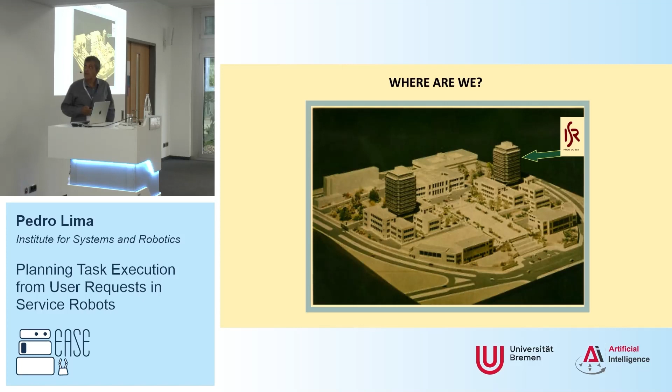IST is the largest faculty of engineering in Portugal from the University of Lisbon, and there are several research institutes. The ISR is one of them. Currently I am the president there, and I am also the coordinator, for several years, of the Intelligent Robots and Systems Group. And that's where the advertisement comes in.

You can see several of the things we are doing there, and it's just a small sample, but we really go land, sea, and air, even space. There's, for instance, an experiment made with the Sphere system on the International Space Station some months ago, and several times actually. We have a lot of stuff on domestic robots, which is what I'm going to talk about today.

We have an iCub in the group of José Santos Victor, which Giulio Sandini mentioned the other day. They also have some nice wheeled robots inspired by that. There's a lot of great work on underwater and marine robotics in general by the group of António Pascoal. And yeah, we also did some outdoor stuff with mobile manipulators and quadrotors.

And there are also groups who don't actually do robotics. They do signal processing, optimization, network systems, machine learning, and also a group which isn't even depicted here on biomedical engineering. So it's quite diversified, and we really cover a lot of different things. Most of the work is in robotics, but not really limited to that.

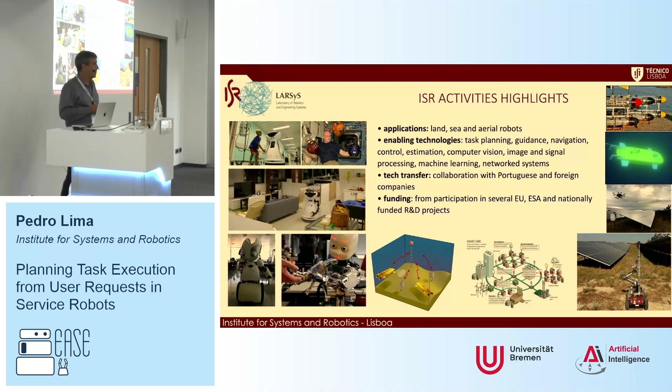And well, it's not written there, but we are always hiring, because there are always opportunities for people from projects and even from the funding of the institute. We have EU projects, national projects, and so if at some point you are interested, let me know, and there will be calls for sure in my group or other groups of interest for some of you.

Okay, so here's the outline of my talk, and let me just quickly go through it now so that I give you at least the idea of what I want to go through.

I'm going to talk about, exactly as Jorn was saying, the integrated system, which of course requires that some great work, like Rudolf just presented, is working fine for detecting objects, grasping, and so on. But I'm really going to look at the higher level picture here, though we are doing some stuff also on object grasping and so on.

I'll try to highlight what are the things which we take off the shelf and the ones that we do ourselves. In doing so, I will be focusing on service domestic robots. That's why I start with some requisites which kind of pave the way for what I'm going to talk next.

Then I do a small detour, which is important for me for a lot of reasons and for the presentation. I'll try to convince those of you who are not convinced yet about the value of robot competitions, which has been my passion in research all the time. And because of that, I'm going to show some of the work we did, which is really inspired by what we had to develop for the competitions.

And we take it as a research project for years. We have had several PhD students and master students doing case studies on that. So I really wanted also to take some time to talk about that, show why it's interesting, and then illustrate some of the results in the end with some of that.

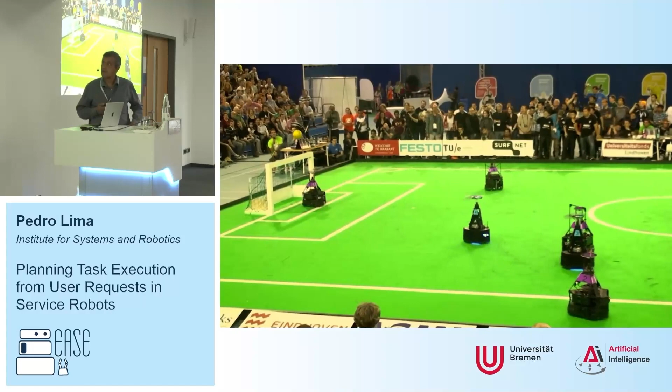There's a lot here, robotics-wise, which is amazing. The robots know very well their localization. They can act as formations, they have their roles. The goalkeepers, and all the robots in particular, have to track the ball in 3D, which is hard.

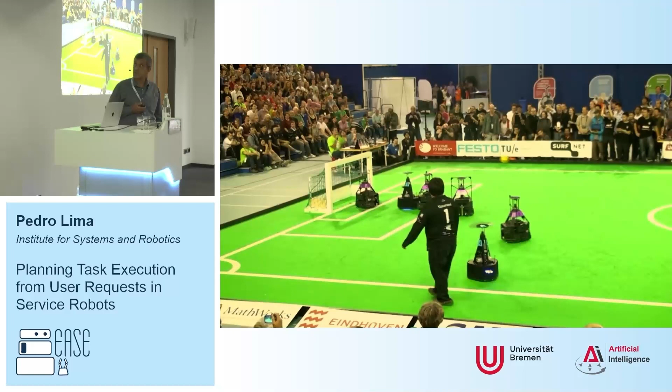This is already from 2013. Things have evolved even better than what you see there.

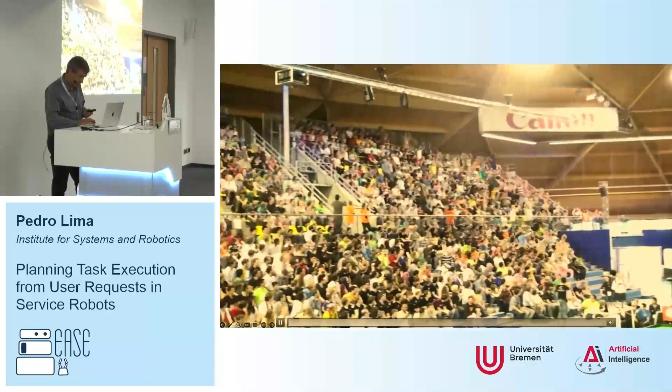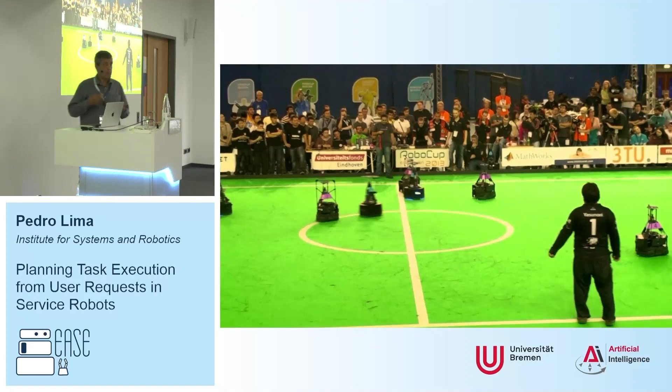There's also a lot of strategy already involved. There was one thing I couldn't call your attention to in the previous part of the video: a robot was actually scoring a throw-in, and one of his teammates was getting into position to prevent the other team from intercepting the ball. They communicate and do this kind of cooperative strategy.

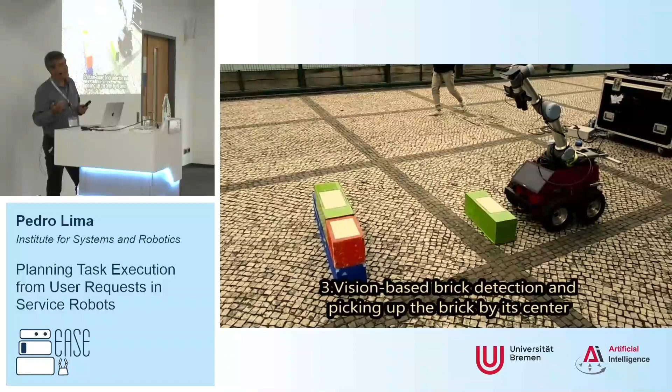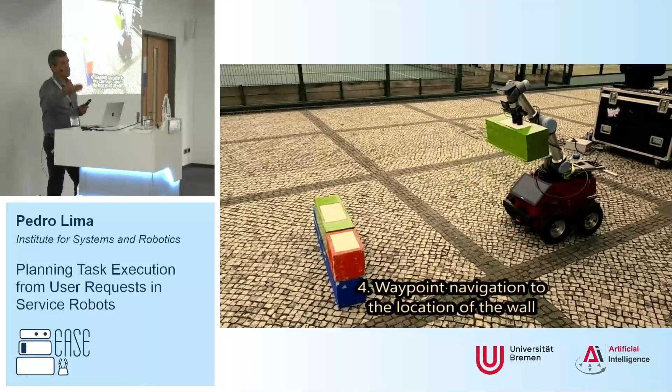Another example—this is actually from us—is from when we participated in the MBZIRC competition in Abu Dhabi three years ago. This is of the non-adversarial type, more of a challenge, as we used to say. In RoboCup, it's a challenge that goes over the years—you want to have a team of robots that defeats the human world champion team by 2050. So you continue improving the rules and pushing the scientific problems over the years.

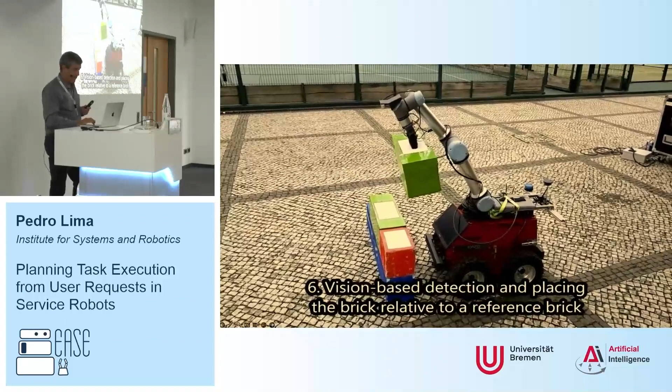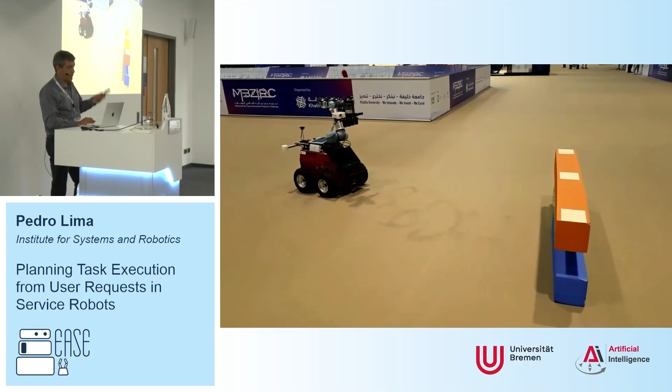Here, what we had were a few challenges that had to be solved that year. One of them was to put bricks on top of a wall. We had a mobile manipulator, everything autonomous—it watches the bricks and decides the sequence, which is sent to it just before the task starts.

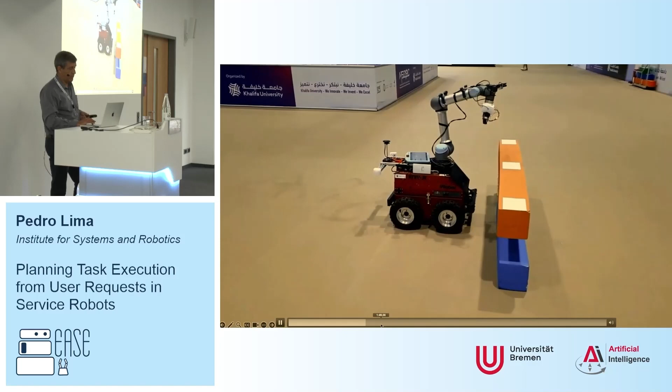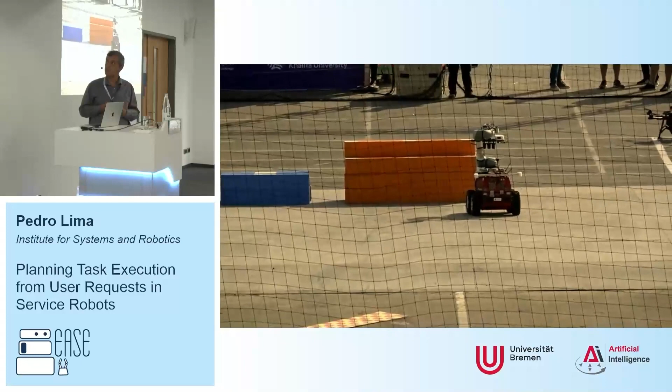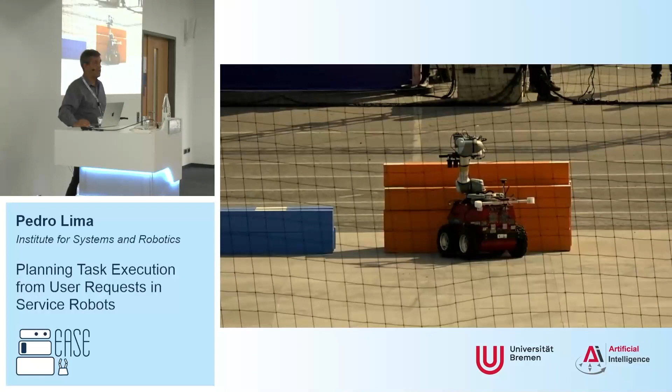Then it had to do it—this was indoors during training, but it had to do it outdoors in a realistic scenario. This included, though you don't see it fully here, quadcopters and ground robots that would cooperate to build this wall, each with different participation. This isn't meant to illustrate exactly what we did, just to show different types of competitions, the challenges they bring, and why they can be interesting.

Now, we started into this with a project in 1997 called Society of Robots.

And just a few months later, Manuela Veloso, who was already very active in RoboCup, came. I mean, she's Portuguese, she usually would go there. She gave a talk, told us about RoboCup and said that we really had to go. No way you don't go to RoboCup since you have a project on cooperative robots.

So it was the first time we heard about RoboCup, and we also put in the name of the project the soccer robots, which also fits very nicely with soccer. And so we started doing that, and we were in RoboCup Soccer from 98 to 2012, I think. And then we moved to RoboCup@Home in 2016.

And here we really have several research topics that we tackle, some more deeply than others. But of course, some of the things we did ourselves: mapping, localization, and navigation, including multimodal navigation in the sense of following people, not just going from waypoint to waypoint. That's essentially the two things. And of course, avoiding obstacles.

Perception, object detection, of course, people detection, grasping, pick and place as well, and a lot of, and this is what I will focus most today, decision making at the level of planning, but also of plan representation, plan analysis, using methods for that, and of course plan execution. And more and more we are getting into human-robot interaction, and that's why I highlighted some of the requisites in the beginning as important in this direction.

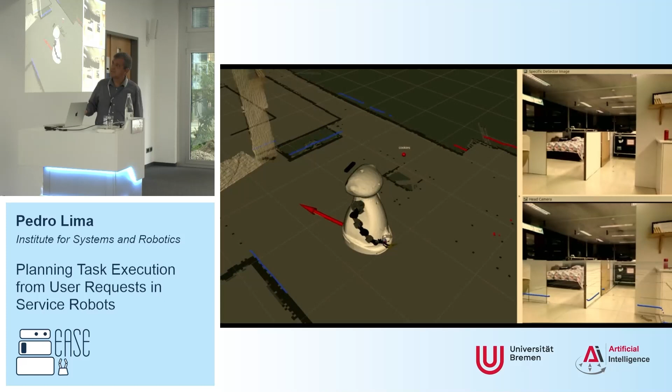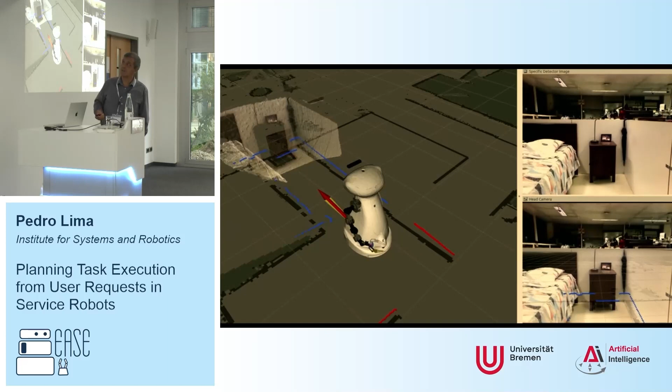The interesting thing also here is that we use a similar representation and reasoning for representing the knowledge and to update it, which is part of what I was saying. Well, this is back, I think, in 2013, just to illustrate the idea. I will skip this one, but as we evolve the robot, this is a real image, this is the projection of laser scanners, and we were also watching the objects that it was recognizing. And this is where the robot represents the estimate of what's going on, its location, what it sees; it superimposes the image so that we make sure that it's well localized.

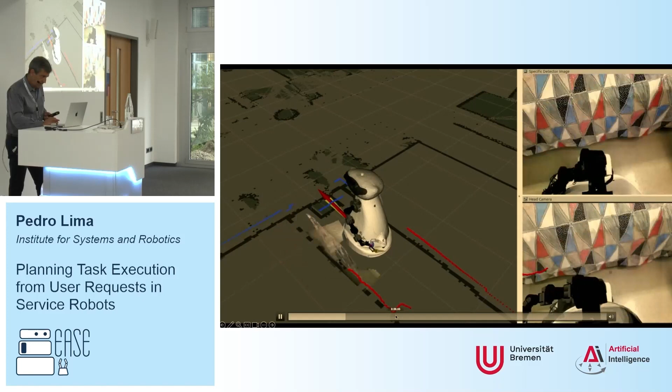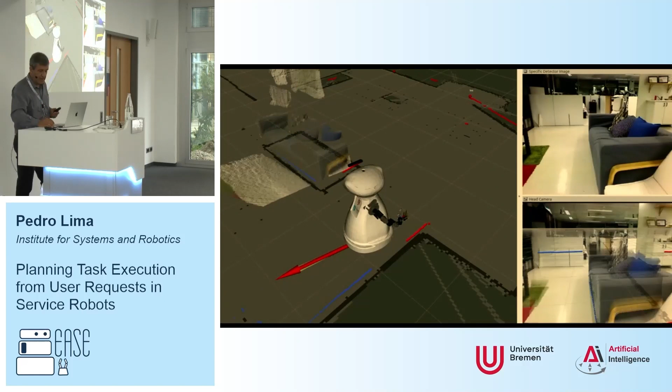But what is relevant, and it's not seen in this part, is that it keeps classifying the objects that it knows and that it has learned. And currently what we do is we put them actually in the Petri net. We put their location there. We even have something similar to a scene graph where we represent the objects, the surfaces where they are, and the room where the surfaces are. And well, this simulator that we have represents a lot of that stuff as well.

Just going to jump in. The detail of that diagram that I promised I would go into next is this one. So this is the part I showed you before, and these are the parts which are more specific now of the Petri net. So the intentions and facts coming from the NLU add facts and intentions to the generalized stochastic Petri net, the GSPN. And also, of course, there's an initial model coming from the known facts, and from that language I told you that generates the world from the fact that it knows the topological map, information about the objects and the robots and so on, and the action models. And all this plus the intentions which specify the goals is used to build the GSPN that I'm going to use to find the policy.

And there are different solutions we use: value iteration, labeled real-time dynamic programming, Monte Carlo tree search. These ones are anytime algorithms. This one is more precise but can take longer. And so once we have the policy, we can actually convert it into the policy of the Petri net executor and execute this part, which is the original GSPN, and send it to our robot and get the feedback and continue updating the state in the Petri net. There are things that we update in the perception that we don't update in the Petri net executor. We just leave it for the next step. So it's like two levels of granularity in our architecture. We leave it for the next time we plan, but not while we are actually doing stuff.

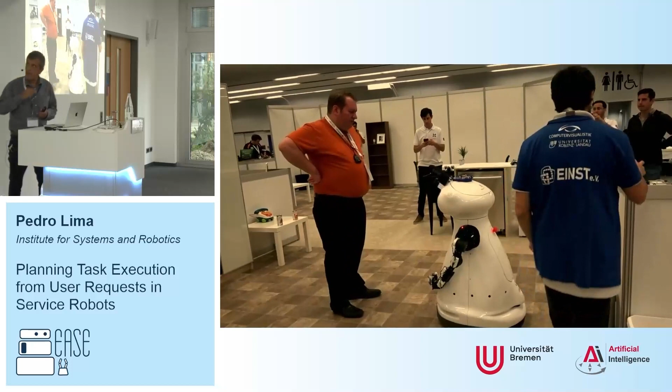Okay, some results. Well, I have 3 videos from different times. I'll go through them not in full detail because I don't have time, but trying to show you some of the things we were able to do with all this building, let's say. This is in Montreal in 2018, this was quite a nice task that we did. It's called Help Me Carry. This one is one of those which is predefined, so no planning involved. This was represented by a state machine, but it actually involves a lot of functionalities.

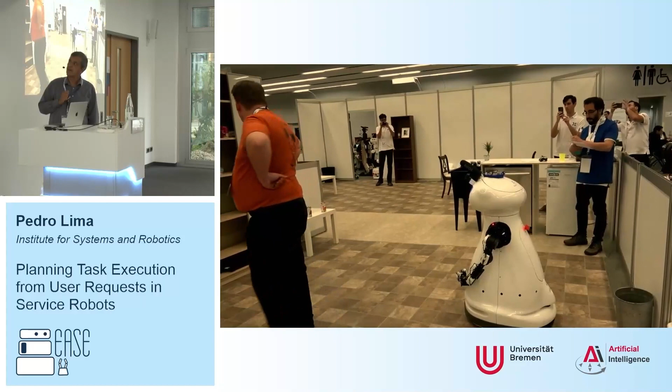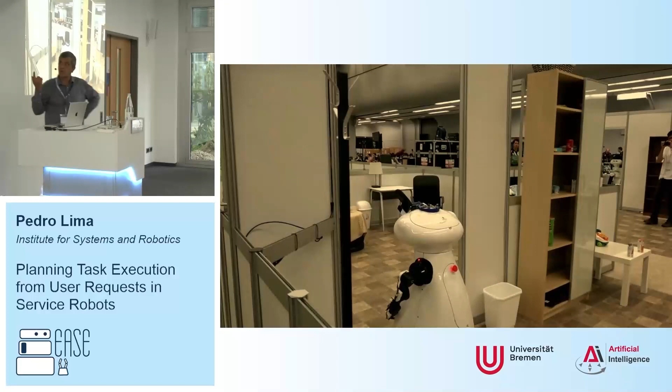So Justin is asking the robot to follow him. The robot first said, well, I'm ready, so please tell me what you want me to do. And now you see here navigation. This is a robot that we developed in the European project Monarch, and that we used for years also in RoboCup, endowing it with a manipulator. So you can see the robot doing navigation inside the room using the map.

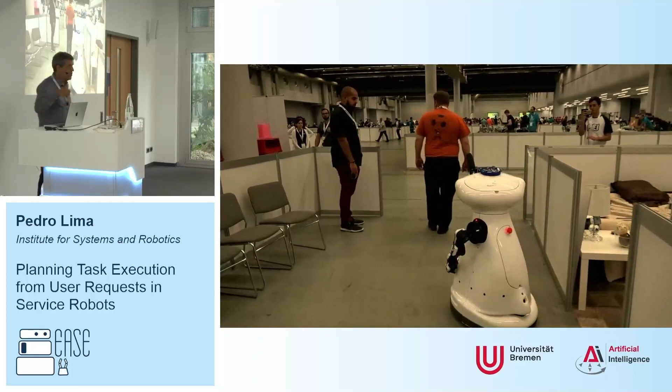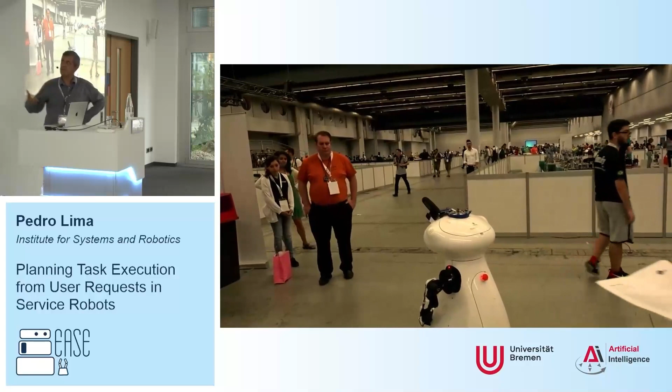Outside, the map is much more sparse, but he is following the person. At the same time, he is not getting lost because of people crossing the way. So there are a lot of challenges which happen to all the teams. You avoid obstacles and people in general. Over there was supposed to be a car with a bag, so that's the idea of the Help Me Carry. We were not doing manipulation, so we would just ask Justin to put the object ready, and we could pick the bag.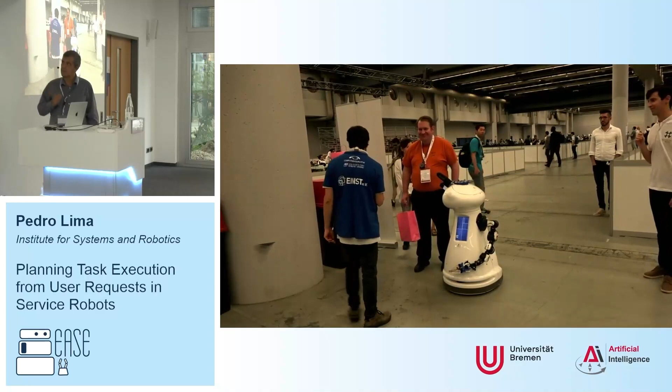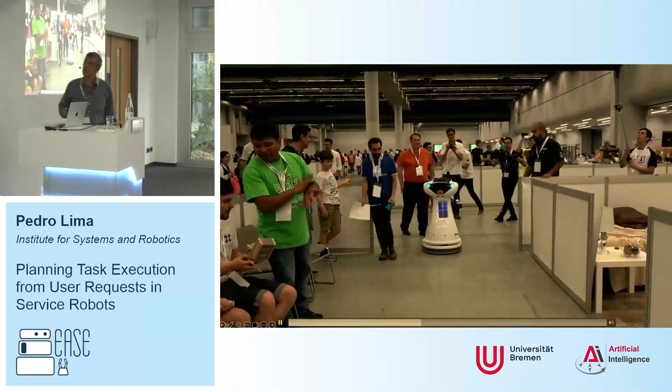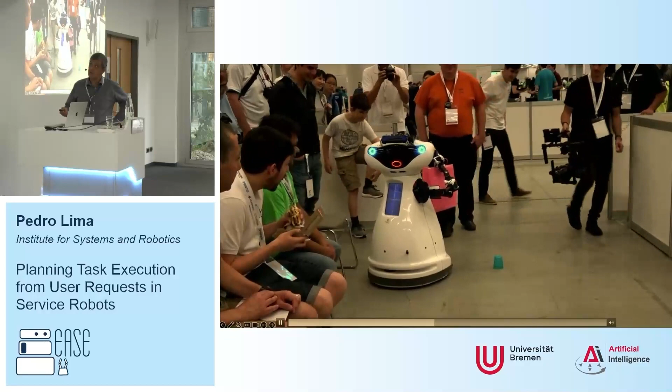And well, just going to the more interesting part, then we pick the bag, we go back, and here there are several challenges. First of all, the robot has more troubles with this part because it was not very well mapped. Then they put this small object that the laser does not see, but the camera over there sees it. You see the head is always looking at the direction of the motion so that it actually sees things like this when it's moving into them using the top camera. It avoided it, and the team was quite excited because we knew this might be a big hurdle and problem.

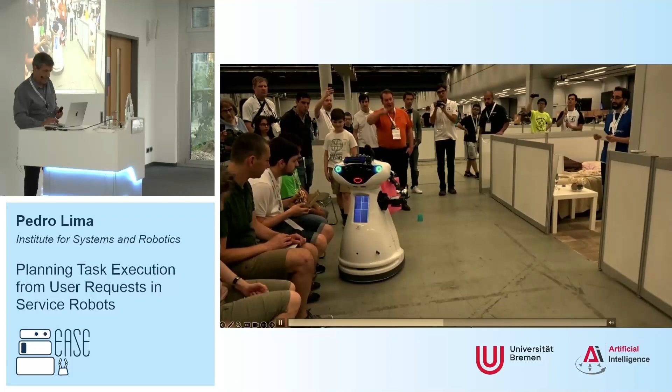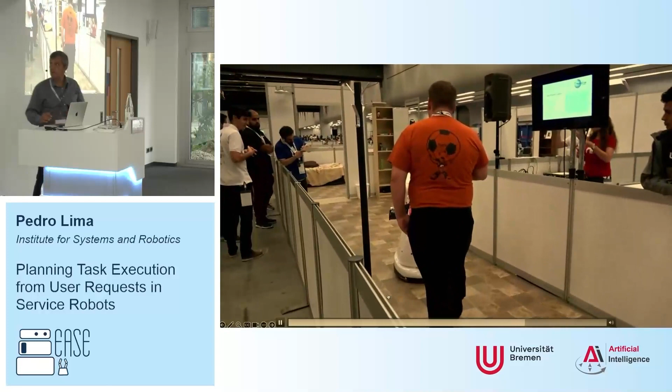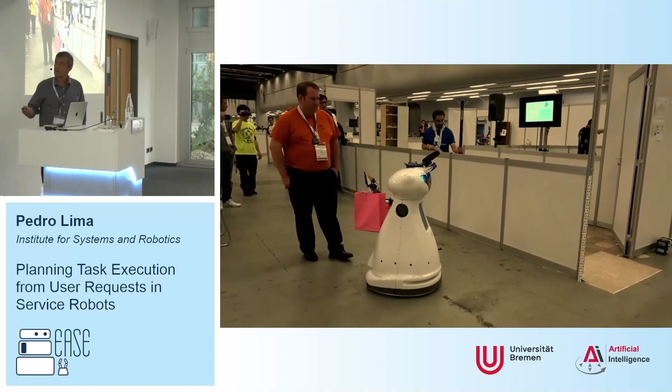And then it also solves another thing, which is slightly unrelated to what I said, but I think it's interesting to see, which is at some point the robot was slightly lost. No, moved too fast, sorry. It was slightly lost. It had to enter the room using this door over here, but it recovered from losing its localization. So it first tried to go to the wall, but then it recovered and it managed to avoid the wall as an obstacle and enter the room.

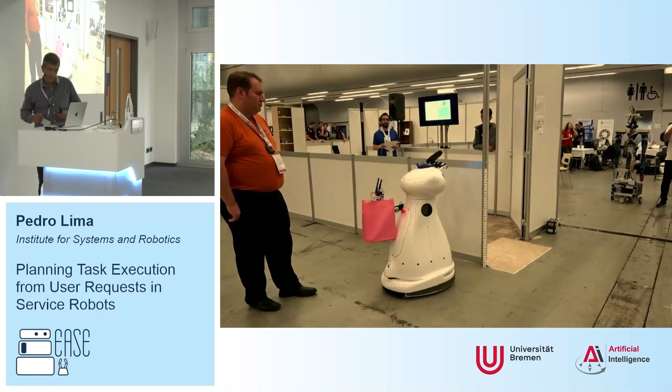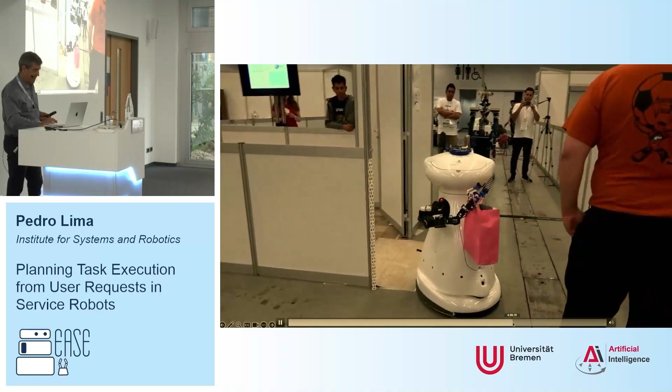And also you can understand why it carries the bag strangely like that, because it's the only way it can actually enter the room, otherwise it would be too difficult. It would not have space in the door. Okay, so it went on and everything was well.

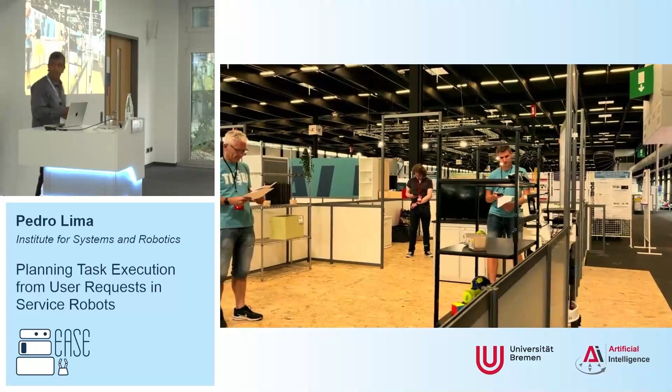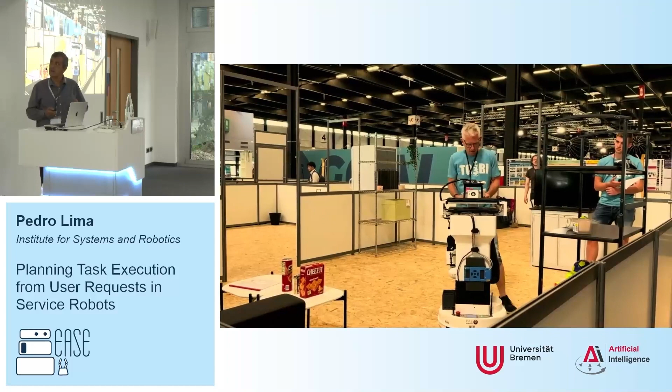This one is quite recent. It's from RoboCup in Bordeaux last July. And here we need some sounds. Well, we need not so much, because you would not understand it anyway, but there are the captions there. So this is something where we were very successful. We actually got an award for the best team doing this there.

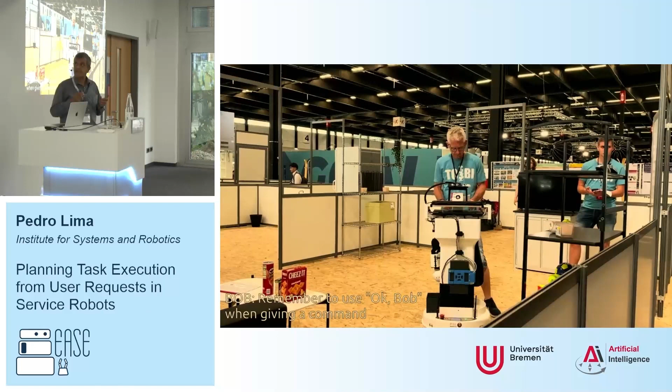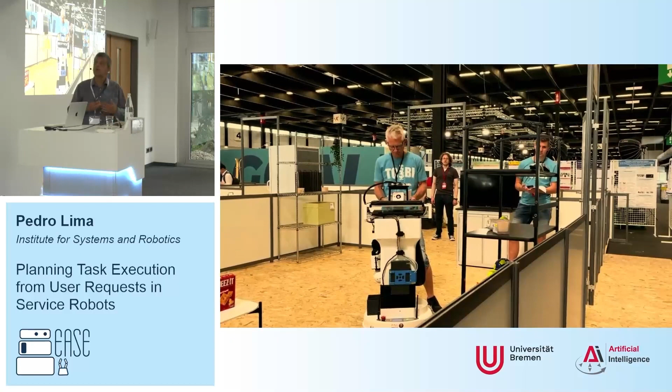And even over the last few years, according to what they told us, there's a task which is called General Purpose Service Robot, and this is actually the reason for a lot of what I showed you today, in which you ask the robot a command from a large set of commands. There's a command generator, but there are so many, it's as if there's always something that is unexpected. You cannot just prepare for all of them. You can probably train a neural net and do an end-to-end approach to this, but we are not doing that at the moment.

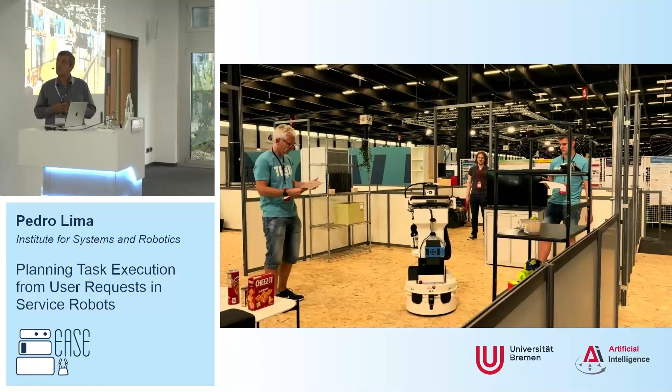So basically, then he asks it to go, I think in this case, to look for that guy and then tell something to a guy that is in another room. I don't remember and I didn't see. And so the robot has to do all the pipeline. So interpret the commands, plan what to do. In this case, it really needs to plan.

Either looking at objects that are there, identifying the person, talking to the person, listening to the person, dialoguing if there's a problem, and once it's done, taking the person to another room, in this case. He did not understand initially, I think.

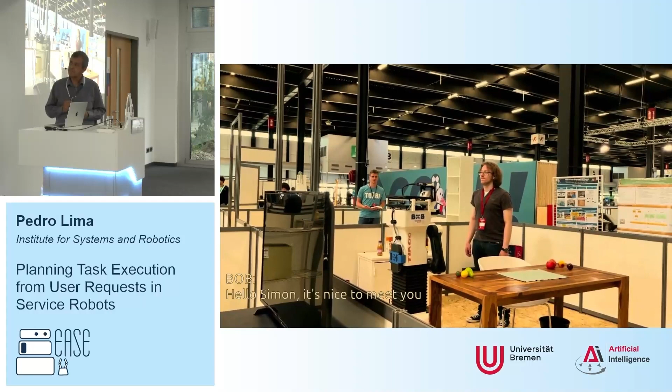Let's skip this part on the benefit of time.

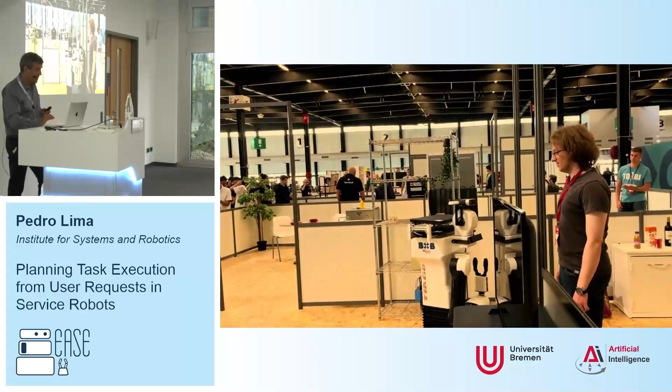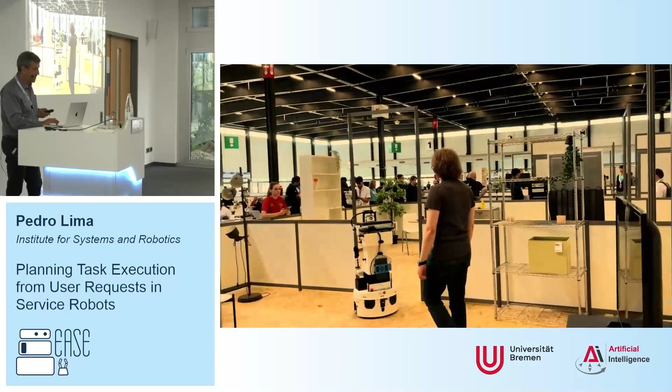So now he asked Simon to follow it, but because it's following, it makes sure that Simon is there all the time. Every time it has to do this, because you can be penalized if you don't, or even if Simon decides to quit, it should stop and ask. So whenever it crosses a door, it does that, and it's actually nice to see.

It does it again here. And last slide, promised, well, yeah.

But for 1 hour I have 10 minutes, right? I will miss the questions, yeah, exactly. I don't want to miss the questions. This one it would be nice to go into detail, but I won't.

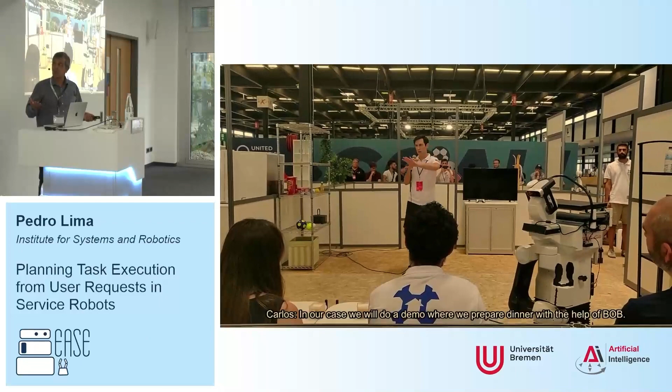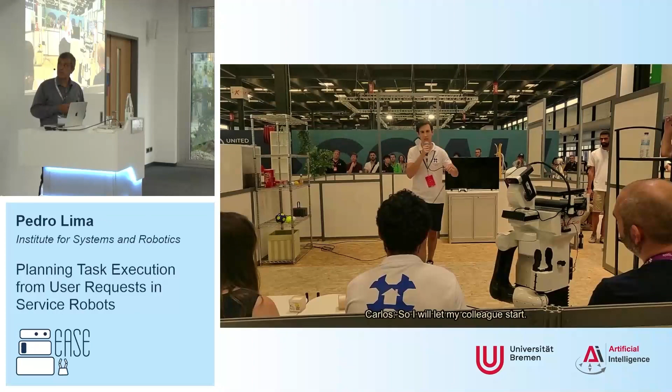I just wanted to tell you that the setup we had ready allowed us to take on this challenge, which was put to all the teams that reached the final 4, and in fact the final 2. We were second this year, the best European team, but there was a Korean team that won here and also in the domestic standard platform league, with Toyota. But I think we did quite well.

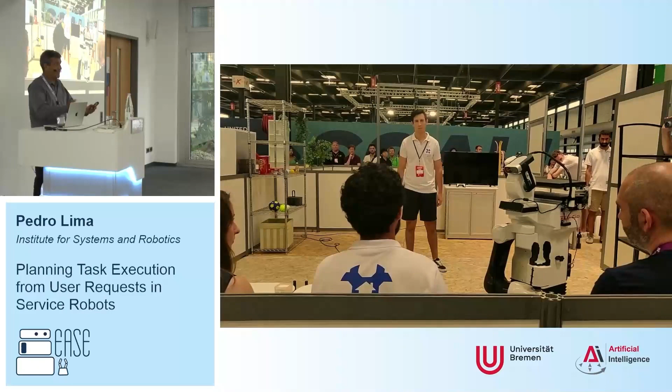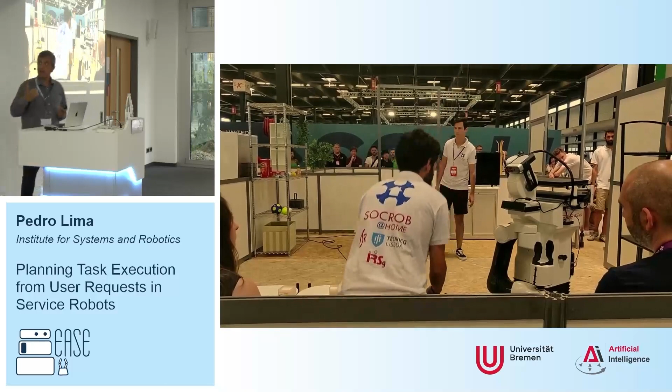In the final, one of the components is you have to demonstrate something you built there in a few hours. The day before the finals, you build it up to impress a jury composed of technical and non-technical people, showing that the robot is useful for the task it does.

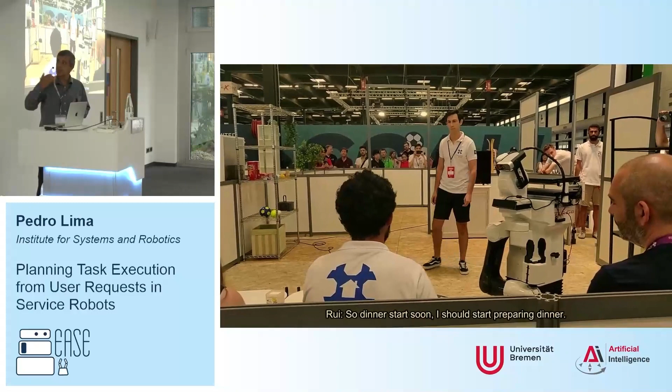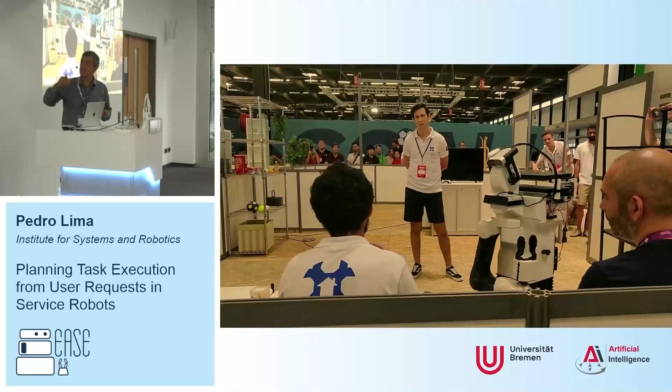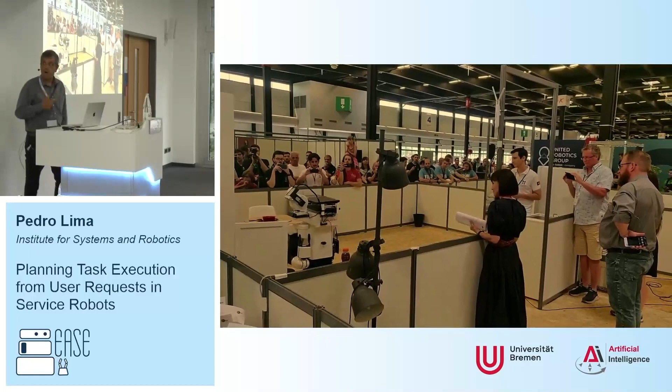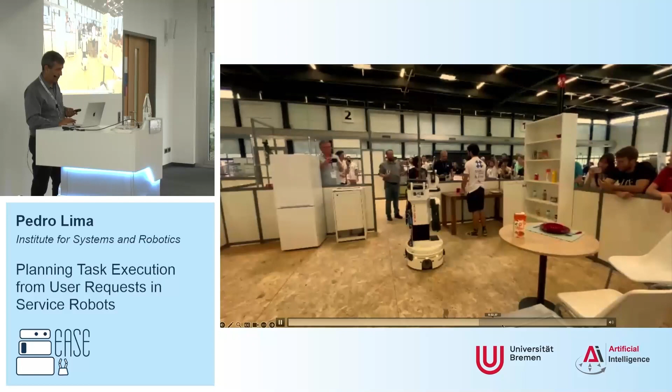What the students in the team did was build a story where this guy had to prepare dinner for a friend arriving. Rodrigo, who is here in the school and part of the team, helped build it. The robot would dialogue, go to the kitchen, search for drinks it could serve, find out the list of drinks did not include wine, and then the guy would ask the visitor to bring some wine. The robot would receive the visitor and take them to the kitchen. All these things were built quickly, just putting together the different modules we had, and the robot worked flawlessly despite having to be prepared in a very short time.

These are interesting because if we want to study the performance of the robot, to benchmark systems compared to others, right now we know how to do it better in some ways than others using the modular approach, because we can go to the different modules, the primitive actions, functionalities, see their reliability, compose it, and predict the reliability of the full task. If we go to an end-to-end approach, that's a problem — how do we do that? This is a big deal.

At the same time, I wanted to emphasize that benchmarking the robot system is very important. In robotics we do a lot of great stuff, we show things — it's a bit what I also did, 'look, man, no hands, it works,' right? But we don't always use the means we have to look at the whole system and check its performance and compare it to others, like what we do in most research and also with the subsystems. Wolf showed that, and other people did too.